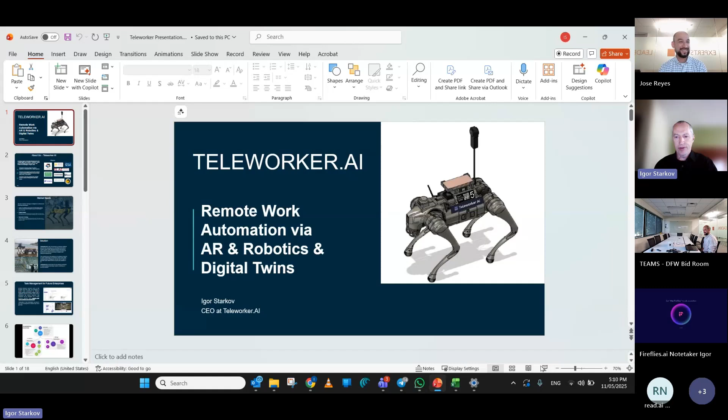So as I was working at Siemens and thinking about digital twins, I observed that humans typically struggle with containing all of the information that we put into the BIM and integrate it with other technologies.

So I started thinking, well, if we humans are struggling, why not deploy the digital twin into the brain of the robot? Fortunately, there were cheaper devices entering the market, like Unitree robots, as opposed to more expensive Boston Dynamics Spots that cost north of $100,000. I realized that it can be done, that now the robots are crossing the chasm, so they are now affordable for any project.

Those of you who work at large construction companies know that most of the top 10, top 20 construction firms did 1 or 2 pilots in the past with expensive robotic equipment just to show that we can do that. But it didn't scale really. So I wanted to make it scalable for every project.

In order to do that, I needed to show that robots can work at the regular project and be cheaper than humans doing similar work. So we started thinking about doing that.

Fortunately, from my past experience with Ecodomus and Digital Twin, I had a bunch of customers that I could reach out to and say, guys, do you want to do that? So we started working with both clients like facility owners, as well as GCs like Christman. And what we decided to focus on is how do we make it at affordable prices?

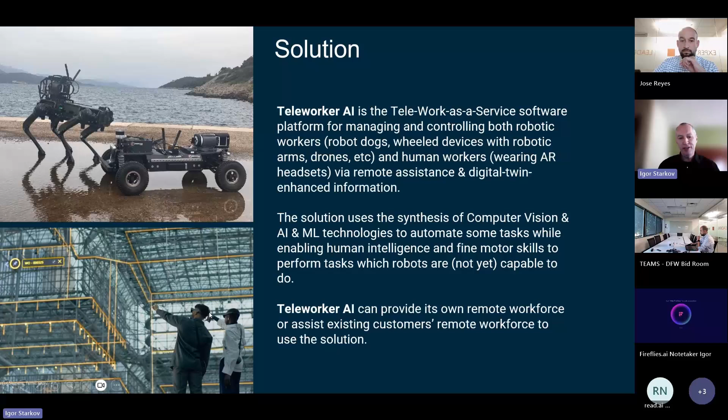So we said, look, let's have augmented reality providing value to the humans, and in the future become a bridge between us humans and the robotic devices. So we started building the software that actually allows us to do that.

We could connect to existing business systems, like Procore, SAP, IBM, etc. And so the tasks that are managed in those systems can be assigned to the robots, or to humans, or to a combination of a robot and a human.

And we can then track it and say, yes, robot number one finished the job, robot number two is still working, and the human assisting them is also finishing his subtask. Through the eyes of either the robot or a human, we can see what's happening at the job site.

But if we want to interfere, let's say the robot doesn't know what to do, then we grab the attention and start manipulating where the robot needs to go or what it needs to do. So it's the same platform for both robotic work and human work, enhanced by digital twins and augmented reality.

On the augmented reality side, like I mentioned, we started working with Magic Leap because as of now these are the best headsets for augmented reality. They have the widest field of view, the best battery life, etc.

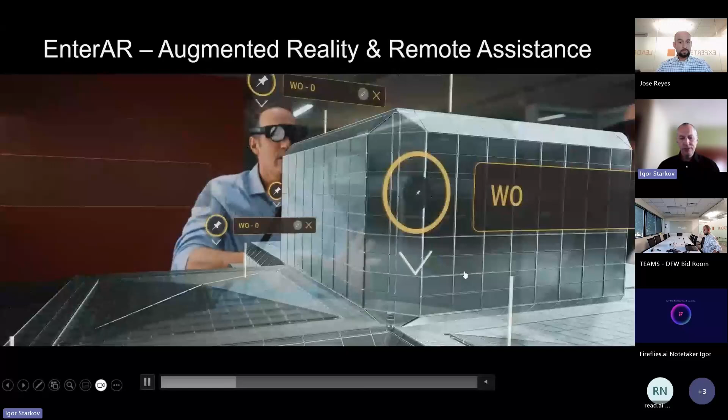So they're transparent, as you can see. We started adding the ability to see the BIM models at 1:1 scale or 1:50 scale. We added the ability to create tasks within that augmented reality as we see at different assets. We had the ability to add work orders and groups of tasks, associate them with the activities so people can open or close them, and these can be integrated with our robotic workforce, so the dogs like that.

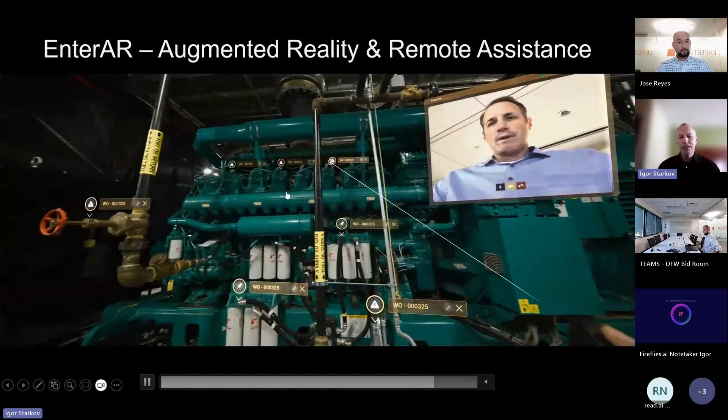It can also show the sensor values that exist during commissioning. For example, you can commission your building better. And quite important is the ability to connect to remote colleagues of yours. So you can create a session with your colleague and look at the same equipment together to understand what needs to be done, right? All of that can work on Magic Leap, or it can work on iOS devices like iPhone, iPad.

So this is an example: I'm sitting in Virginia here and my colleague is in Michigan at a Christman job site, Hannah, and I tell her, Hannah, please go straight, Hannah, turn left, Hannah, go straight. And so the BIM that you see here in the window, she can see it in real life, as if all of those pipes are real, even though it's all overlaid over the actual job site.

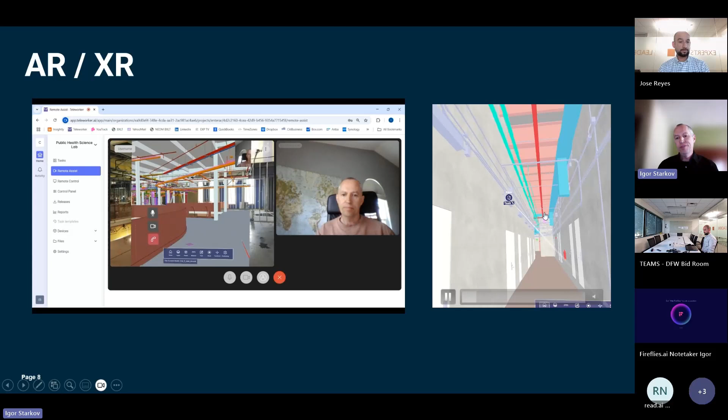And I see it through my regular web browser interface. So if there's some task, let's say you have a Revizto clash, we receive that Revizto clash into our system. We review it with her together. She's standing at the site, I'm sitting at home, and I tell her, Hannah, can you please hide that wall? I want to see what is inside of the wall.

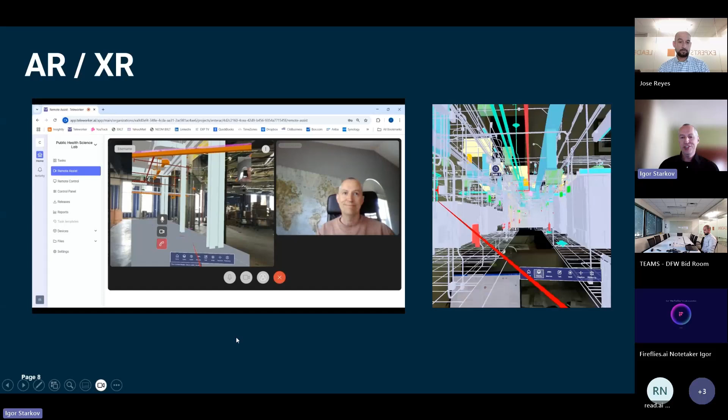She said, sure, let me hide the walls layer. And she's hiding it, and we can see through the walls and the ceilings, so kind of X-ray vision. And so she can actually do something right there at the site. So she's acting as my human robot pretty much, right? She's doing whatever I need from her to do.

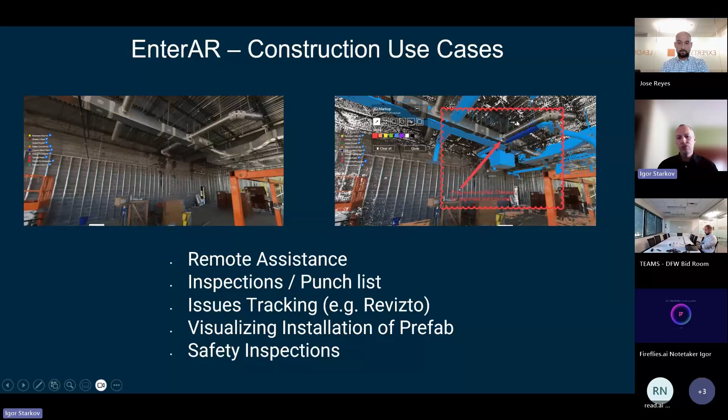She can, for example, identify that something is not installed correctly. Like, let's say my subcontractor said, oh, I'm done, and I'm looking at it and say, wait a minute, where is that blue box? I don't see it right here, right? So this can be done for QC, this can be used for safety inspections. Let's say you identified some issues, generated this, and everybody else can see what's happening at the job site.

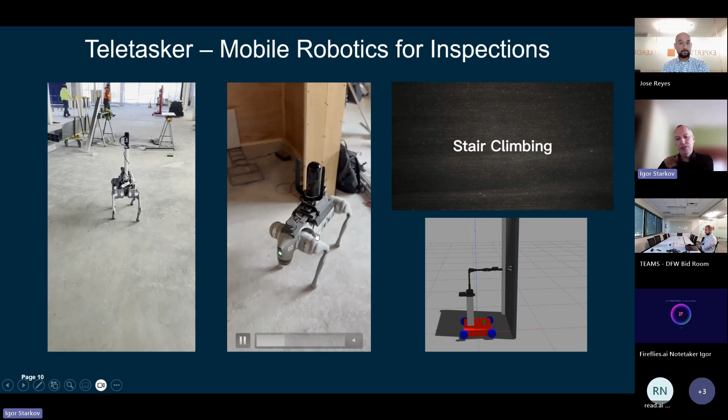So we work with OpenSpace, Track3D, Drone Deploy, and all of the other toolkits can also be supported by this workflow. Or this can be a robot dog with the laser scanner, like in this example it's a Leica BLK ARC, or it can be Faro Orbis, or some other type of engineering grade point cloud scanner, right? So if you have workflows where you need that level of scanning, it's doable.

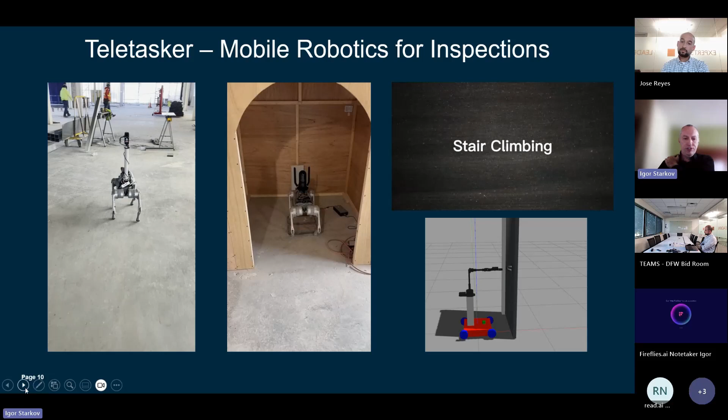So what you see here, by the way, is the charger, that's where the robot sits to grab more juice for itself. It doesn't have to be the dog, it can be a wheeled device with 4 wheels, or it can be a device with tracks like this. You see how it's climbing up the stairs. So all of those are just different devices that can be deployed.

Now let's discuss what they can be deployed for. They can be deployed for reality capture, like I was just showing, but they can do other things. Let's say you do reality capture for 2-3 hours, but then it can act as the night watchman, or you can be tracking the RFID tags of the materials at the job site to say, hey, I have a pile of this drywall in room 105, it's actually supposed to be in a different room, right? Or they can be sensing the Wi-Fi signal and identifying the dead zones, and then reconfiguring your mesh network. So there's a lot of different things that the robots can do.

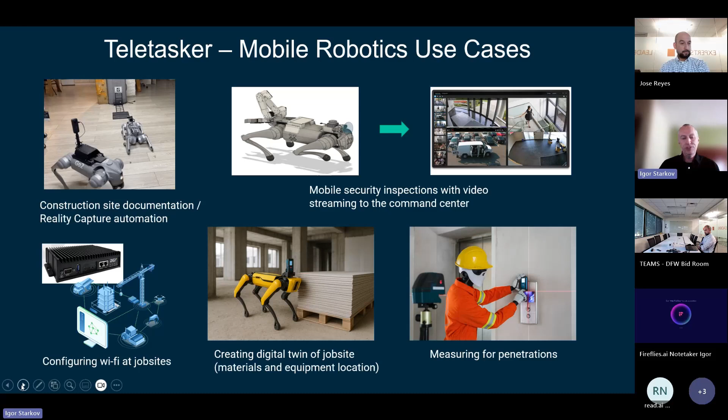We are just starting, obviously we are about 1.5 years old, right? So we are adding all of those use cases slowly to the pile of what we can do.

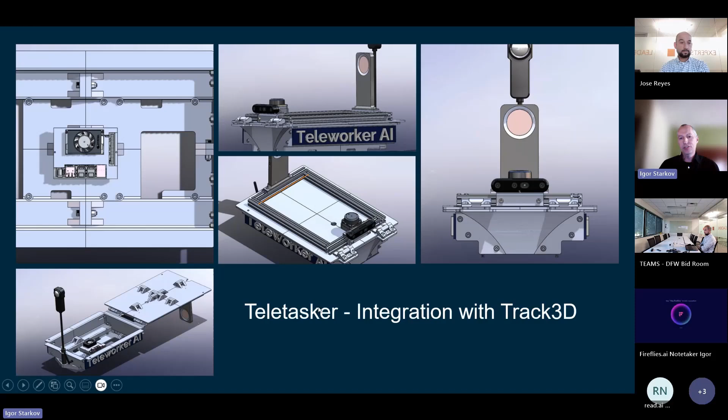So these are some of the examples of integration with OpenSpace, with Track3D. They have some different requirements as to how the cameras need to be mounted, but all of this is doable.

In terms of how we actually explain why people need it: if you have a fully loaded cost of the person you hire at $80 an hour—industry average is around 75 across the country, in some areas it's 80—if they work for an hour or hour and a half, they'll charge you for 3 because they need to get there, then go back, relax, etc. So you have, let's say, $240 per walk. In the past, people were trying to do it every other week or once a month.

But with new AI capabilities—Safety AI from Drone Deploy, Progress AI, and other things—everybody realizes it's beneficial to do these kinds of walks every day. Every shift starts with somebody evaluating what's happening at the job site. Everybody wants progress tracking, like Track3D or Disperse. We realized that as a human, it would cost something like $4,800 just to do this simple walk. We charge $3,500 for everything—the robot, the service, the software, the whole nine yards.

So we can definitely explain why it's just cheaper. Also, the robots walk through the same path versus humans, who today want to go here, tomorrow want to go there. So you don't have stability, and then next week I'm on vacation, etc.

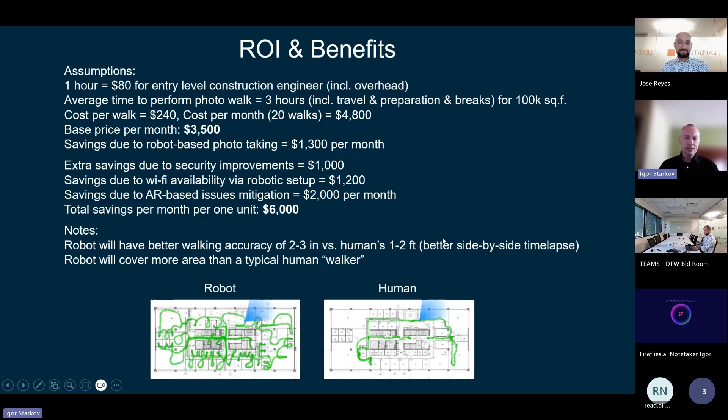That's what we see in terms of the benefits of robotic workforce. Starting with the dogs, like I mentioned, we are looking into how humanoids are going to be implemented at the job site. In this example, the humanoid is doing some hole drilling.

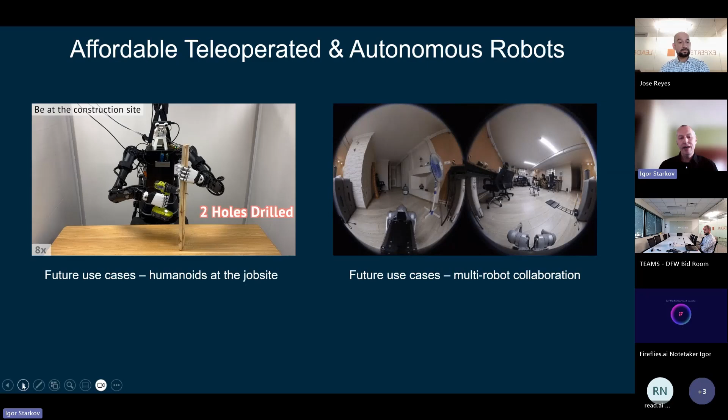I've definitely seen some examples of humanoids that can be used for energizing the site. There are some other use cases coming. I'm not a big fan of the humanoid form factor—it's too complex, and lots of these tasks can be solved with a simpler form—but they are coming. People are getting interested in having them, so we need to be prepared for that as well.

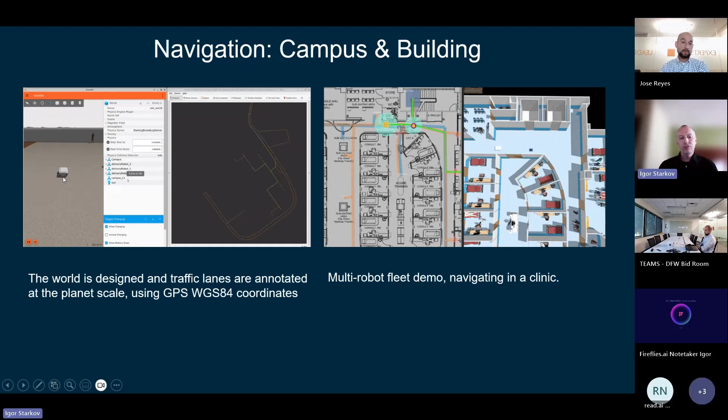We can deploy these robots inside of buildings. In this example, there are multiple robots communicating with each other—let's say this is robot number 1, this is robot number 2. We establish how they navigate, or they can be deployed outdoors. These are usually unmanned ground vehicles that can travel across difficult terrain using GPS. We can locate them, and we can integrate them with the digital twins.

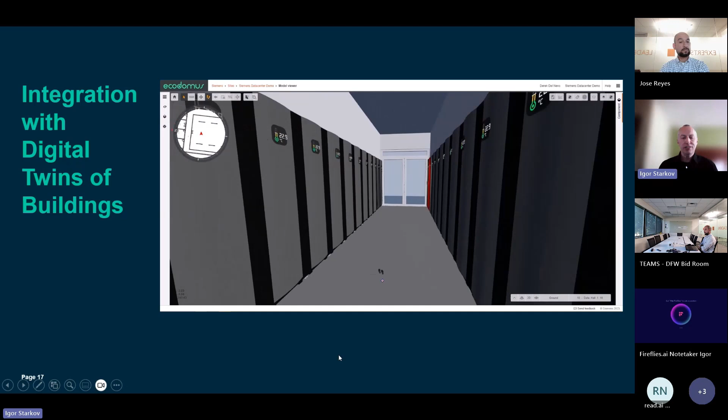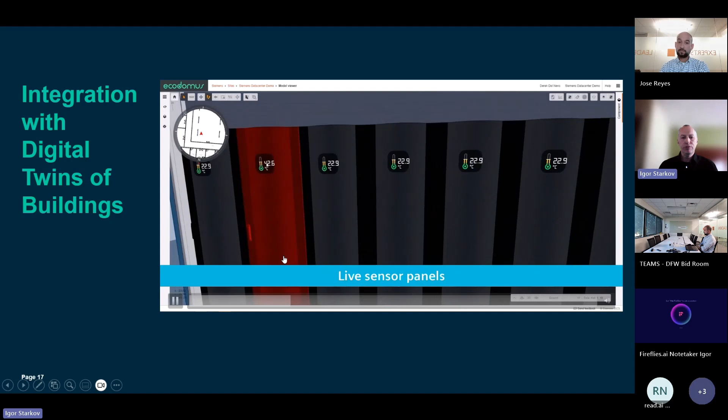In this example, this is what my previous software solution does, now called Siemens Building Twin. We're looking at how these robots can help clients and owners after the project is finished. For instance, let's say we got an alarm from this rack. As a human, I would go there myself, look at it, understand the temperature is too high, then start investigating the history of the sensor values and what metadata, drawings, or documents I have about it.

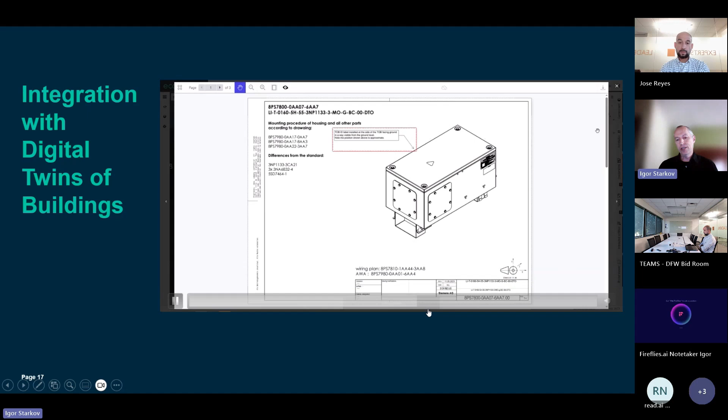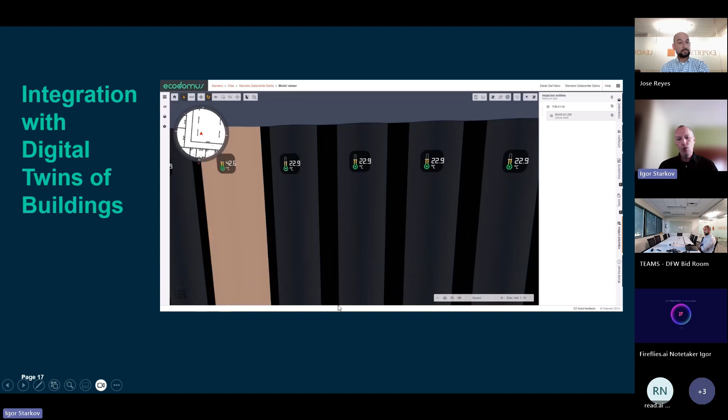We're actually working right now on a similar project with Autodesk Tandem, which is also a pretty sophisticated digital twin software. Now robots will be integrated with this set of solutions to perform inspections—they'd be able to walk here, measure something, maybe even replace some faulty parts, like a faulty UPS or something else, depending on the complexity of what needs to be replaced.

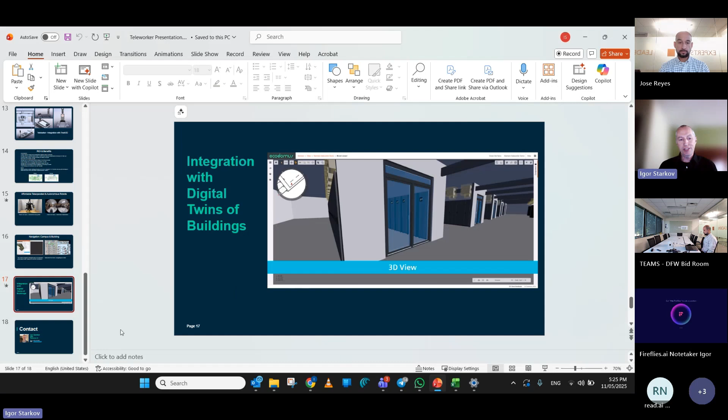So that was the first part of what I wanted to show you in the presentation. These are my contact info, so if you're interested, I'm happy to provide more details. I can show you a few other videos from my job sites and projects.

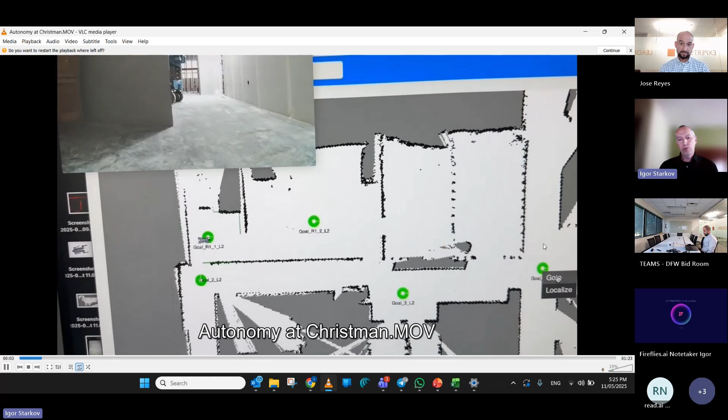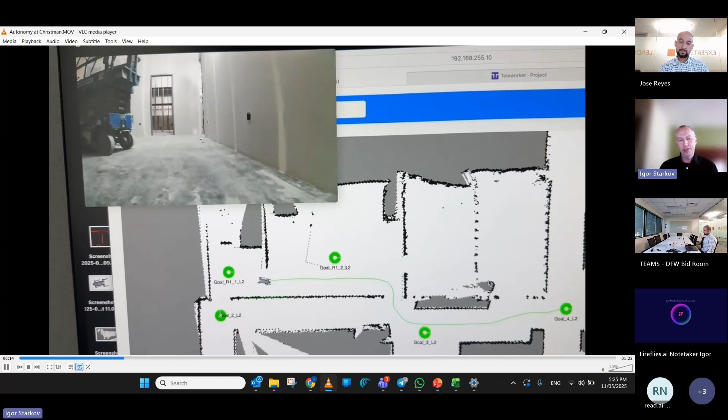Here's an example of the autonomous walk. What we do is create a SLAM map of the environment, and then the robot defines how it would walk across. For example, I can say you can go to these rooms, don't go to these rooms—I don't want you to go there, just don't. The robot says fine, and builds itself an optimal path and just walks across that path.

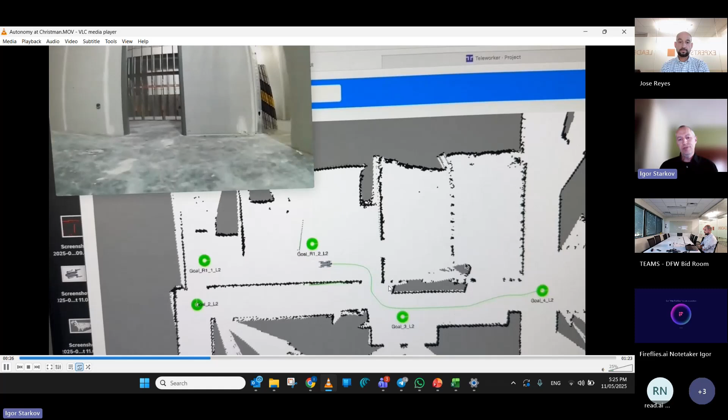It doesn't go where you don't want it to go, but it avoids the obstacle itself. So this is the autonomous walk, completely - we are not touching it, right?

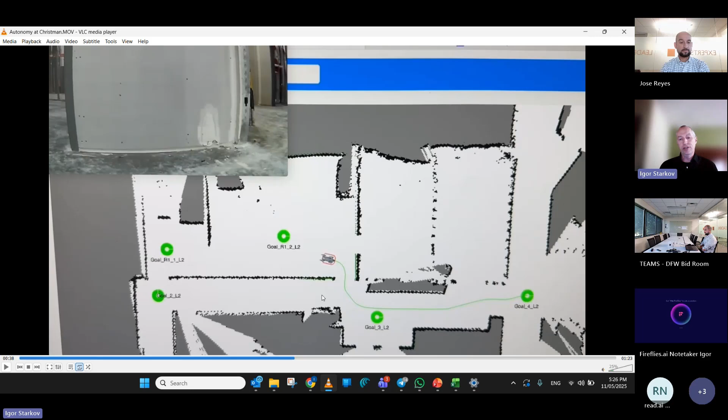So if we do want to touch it, let's say somebody's standing in this door frame and doing some work here. Then a human supervisor would interfere, and maybe we send an audio signal saying, hey, can you please move on? I need to walk here. Or we just say, hold on, no problem, I will go through this door or some other door. So it's up to the human to make a decision in terms of that.

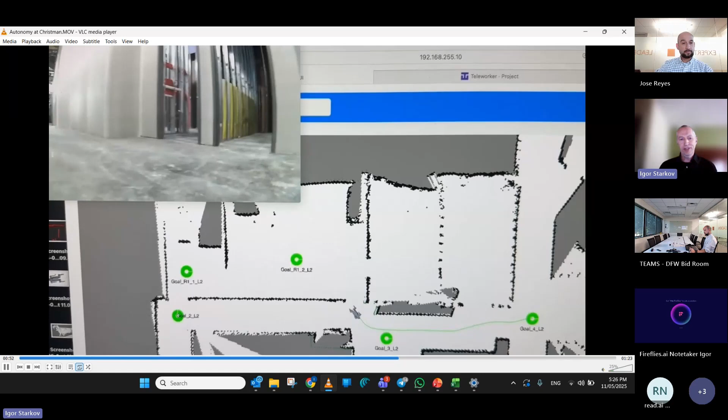If there's no obstacle, the robot continues and walks around until the battery gets drained and it needs to go back to the doghouse where it sits and waits for the next command, right? So that's what the different examples are.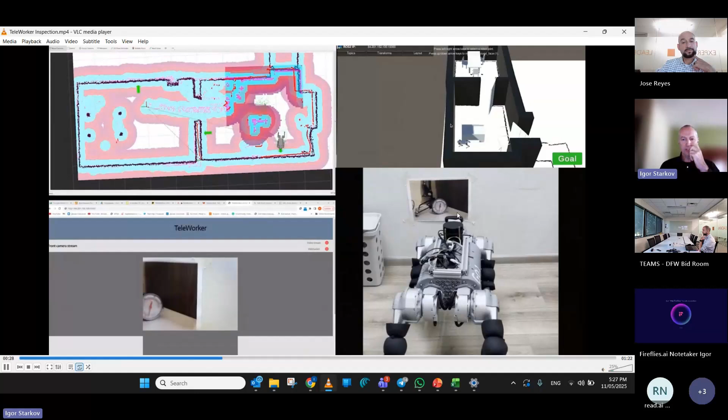This is another example, an old video from maybe a year and a half ago that shows the brain of a robot, how it thinks about where it needs to go. This is the robot within the 3D. Let's say it gets to that valve, reads the value of this valve, translates it into digits, and sends it to the necessary software for future analysis. Then it avoids this obstacle, gets to the next meter, reads the value, and sends it to wherever it needs to send it. So that's just another example of that.

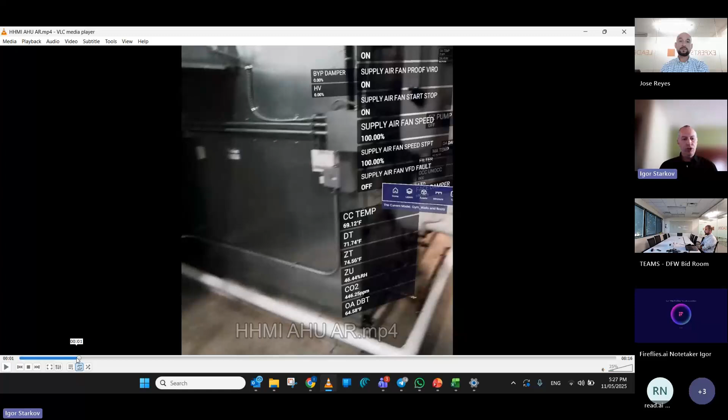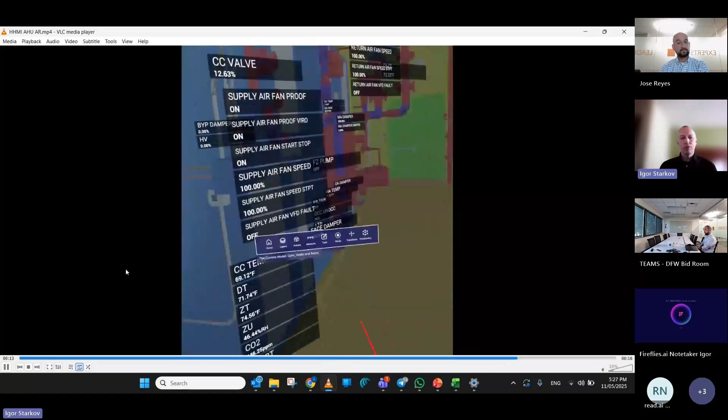And in terms of augmented reality, we also observed there's a benefit for commissioning, when you start turning on and off your BMS system, understanding what the values are. So I'm standing in front of this equipment and I can see real-time values here. I can turn on and off my 3D layers here. So as a user, I'm present remotely at different parts of my job site, performing this analysis through this virtual web interface, an AR interface.

All right, so that's pretty much what I wanted to show you. Any questions? No, that's great. That's great, Igor. I do have a few questions about things I've been trying to overcome.

If you want to leave that up so folks can keep it up for a little bit - I don't have another great slide to put in its place. So I think one of the things I've been struggling with is communication on the job site. What are some of the hurdles you've been able to overcome, whether it's existing Wi-Fi or do you rely on 5G? How are you connecting your equipment, the job site in general, and the three-dimensional model, whatever form that lives in? Is there lag, is it instantaneous turnaround time? How do you prepare for, say, a review with five other trade partners and a design team?

What's the optimal layout? It depends, of course, on where the job site is located - if it's covered well by one of the cell service providers, let's say T-Mobile or Verizon. If not, there's always Starlink as a backup. It also depends on what is inside the structure - is it a thick concrete wall with rebars that are blocking the signal? It also depends on how the walls are structured - is it an open warehouse-like environment, or are there a lot of small rooms? So all of those things affect the signal.

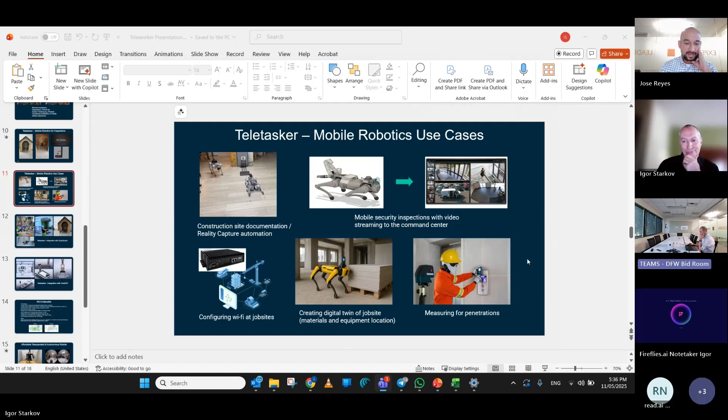I think what we've been discussing on the artificial intelligence front, on the large language model front, is that it takes virtual design and construction, VDC guys, to educate and advocate for these technologies. I do second that statement - we are the educators, more or less, a lot of times.

My thought process is that we're going to have to learn how to develop and control the large language models so that it's just another tool. I think it gets kind of blown out of proportion, though it is people's concerns - the real world consequences that all of a sudden folks aren't allowing you to develop or present, to bring different technologies to the forefront, because a portion of their team is nervous and scared that these things are going to take their jobs. That's the soft side of construction that really isn't often discussed.

The soft side of construction, right? Why would you have an issue with a humanoid robot taking your position? The psychology of that, it looks like me, it's doing something similar to what I'm doing now. The rate of technology and the advancements we're seeing, why would I continue working this hard in my current direction or career? Some may say now there's a lack of career direction because of something like that. But the sheer notion that comes with the psychology behind having something look like you doing the same job you're doing, that's in my opinion why they have these robot dogs. Because the robots themselves can be kind of scary, but you want something a little friendlier to look at, and the idea of this robot dog walking around the site is digestible, and people can get behind that.